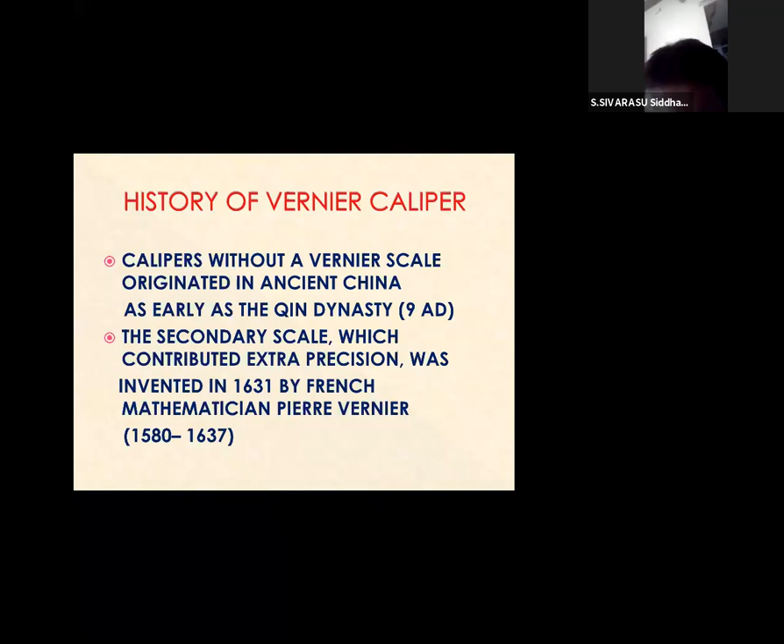Before entering into all these things, what about the history of vernier caliper? They invented the instrument in China, during the dynasty period, 9 AD. In China only, initially, they founded it. Later, the vernier caliper came in two scale systems: one is the main scale, another is the sliding scale, the vernier scale. The secondary scale, which contributes extra precision, was invented in 1631 by a French mathematician and scientist. His name is Pierre Vernier. By using his name, it was called vernier caliper.

Now, why is it called vernier caliper? The vernier caliper has two scales. One is marked along the whole length of the caliper, with graduations marked according to the length of the caliper. Another part slides over this scale, and this scale system was invented by Pierre Vernier, the French mathematician. By using his name, the caliper is called Pierre Vernier caliper.

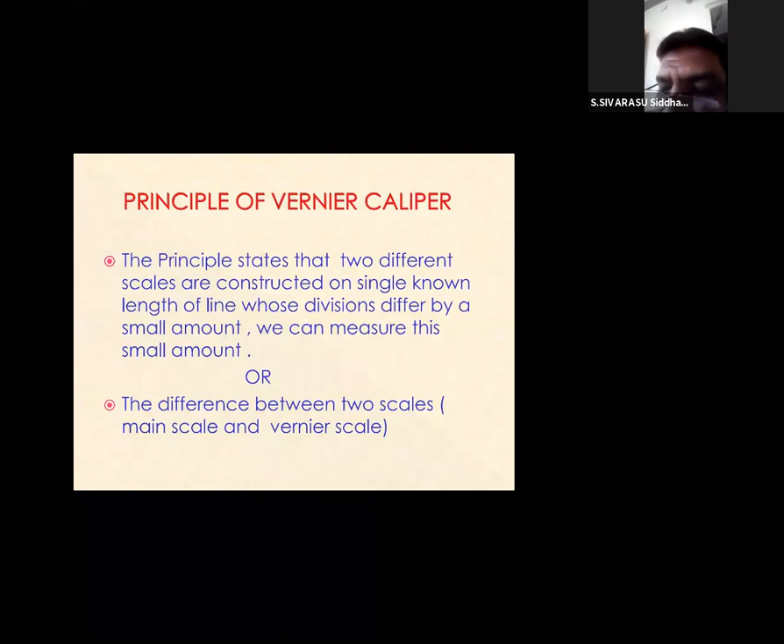What is the principle of the vernier caliper? The principle states that there are two different scales constructed on a single known length of line, whose divisions differ by a small amount. There is a difference between one main scale division and one vernier scale division, which we will discuss later. Based on this difference in divisions, we can measure that small amount using the vernier caliper. In short, you can say the difference between the two scales, one main scale, another the vernier scale, is the vernier principle.

Sir, can I unmute it so that I can ask the trainees a question for clarification? Hello? Do you have any doubt on what was discussed?

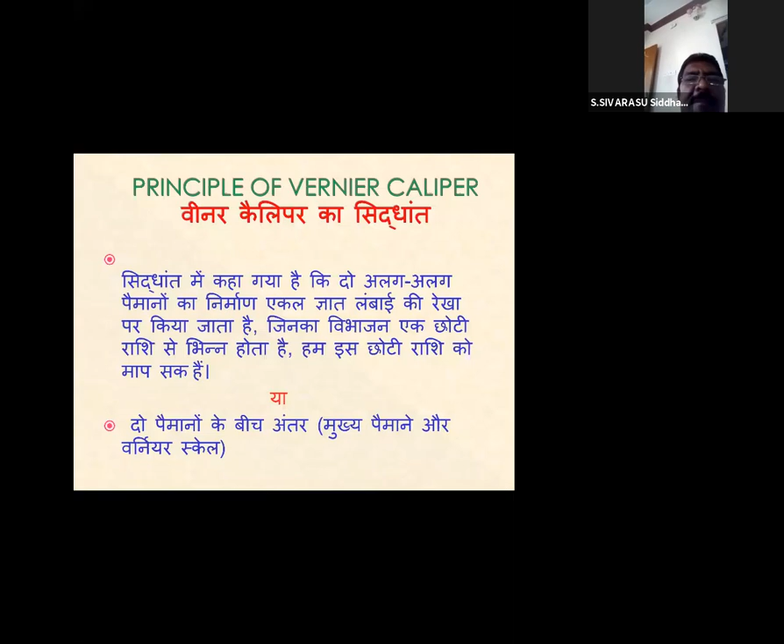What is the next one? What is the use of vernier caliper? I will show in the form. By using the vernier caliper, we can measure three types of dimensions. One is measuring the external dimension of a job, that is outside diameter. Another is we can measure the internal dimension, that is internal diameter of any kind of job. Thereafter, we can also measure the depth of the job. So this is the main use of vernier caliper. By using it, we can measure the job with an accuracy of 0.02 mm. There are different measurements we can take: internal measurement, external measurement, and depth measurement.

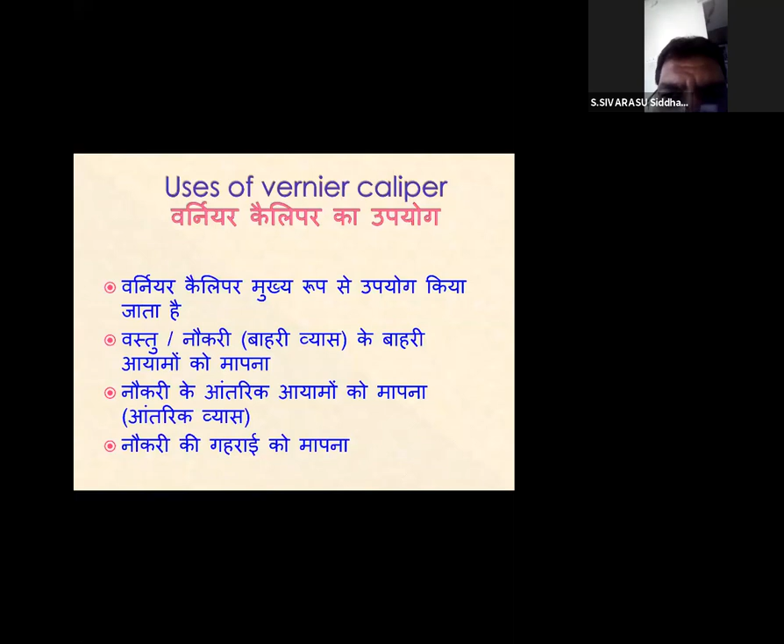Now we'll discuss the vernier caliper. What are the major parts of the vernier caliper? Now you see this. The upper part is having a nib that we call the inside measuring jaws. By using that, you can take the internal measurements.

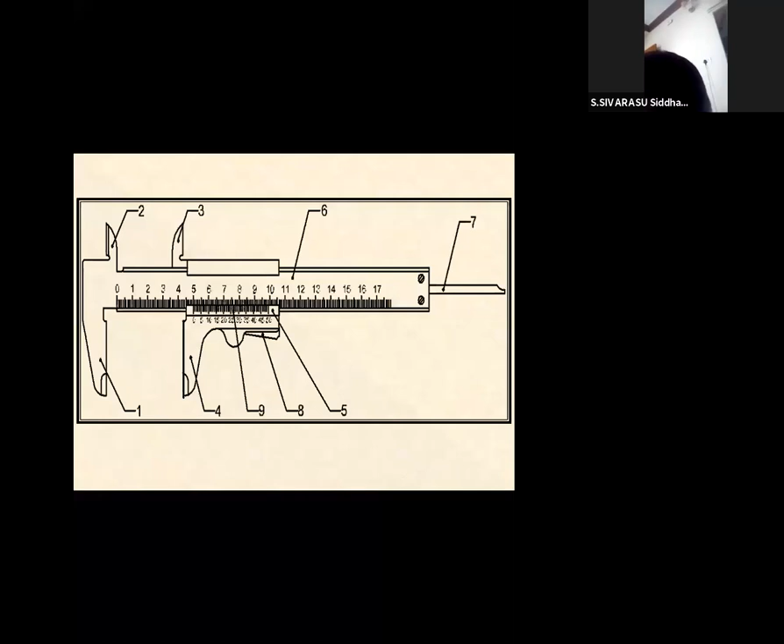What is the use of each and every part will be discussed. Once again I will tell you the parts names: part number 1 and 2 is the fixed jaw, part number 3 and 4 is the movable jaw, part number 5 is the vernier slide, part number 6 is the beam, part number 7 is the depth bar, part number 8 is the thumb lever, part number 9 is the vernier scale. These are the parts of the vernier caliper.

Now do you have any doubt?

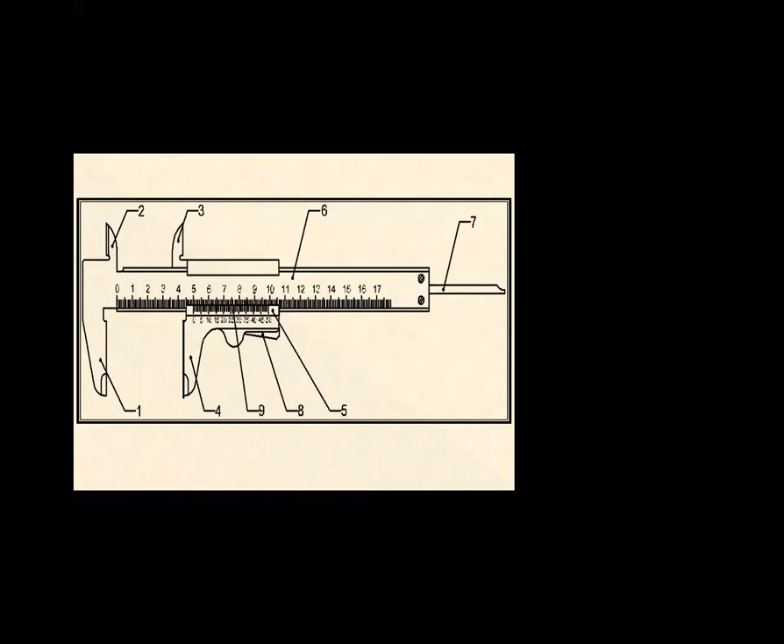Now I told you already about the parts - it is a fixed jaw, I will show you and explain that part. The fixed jaw is part of the beam scale, which is attached to the beam scale. So one jaw is for taking external measurements, and another jaw is for taking internal measurements.

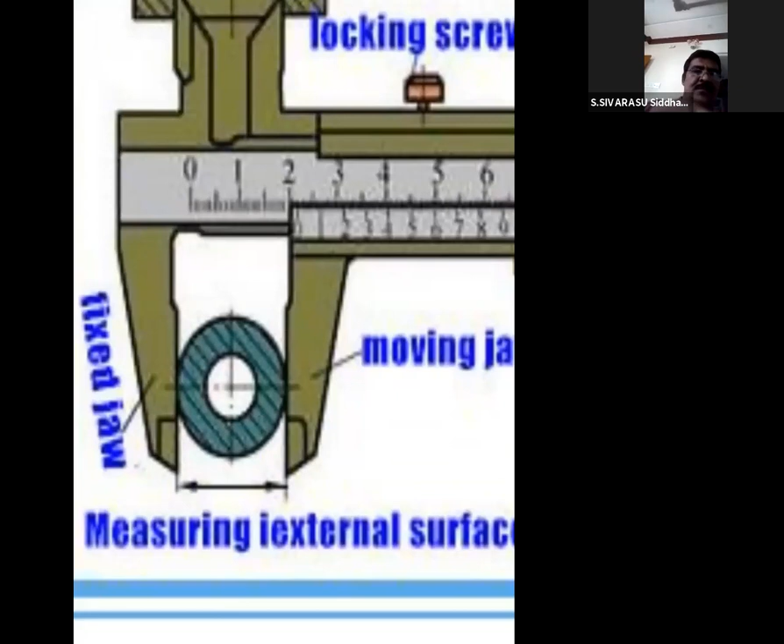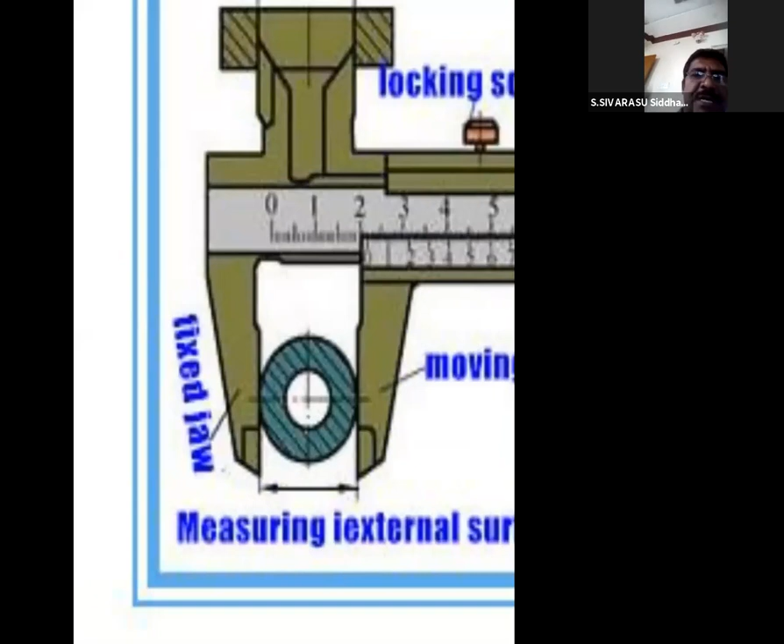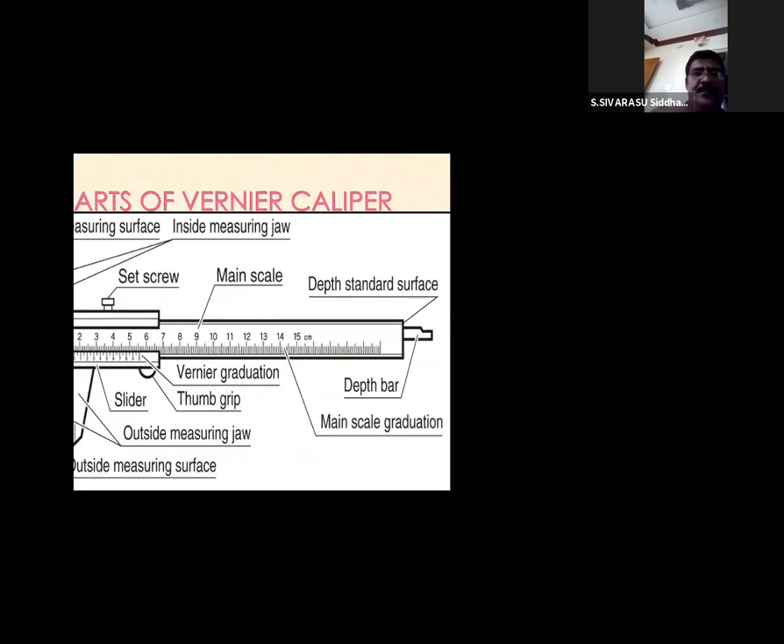Next is part 3 and 4, that is the movable jaw. Why do we call this the movable jaw? This movable jaw is sliding over the fixed jaw. The fixed jaw's main scale or beam is attached to the fixed jaw, and the movable jaw slides over the fixed jaw, that is the beam. Once again, I will tell you - you can see the figures.

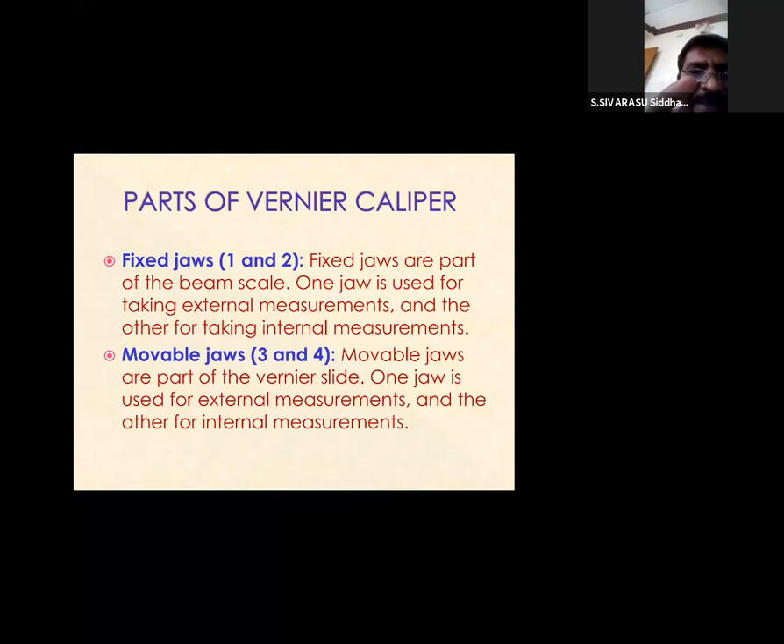Part numbers 3 and 4 are the movable jaw, which is also part of the vernier slide. Part number 3 is mainly used for taking internal measurements, supporting internal diameter measurements. Another jaw at the bottom, part number 4, is used to take external measurements.

Now using part number 1 and 4, by supporting this, we can take external measurements, outside diameter. Part number 2 and 3, by using that, we can take internal dimensions, internal diameter.

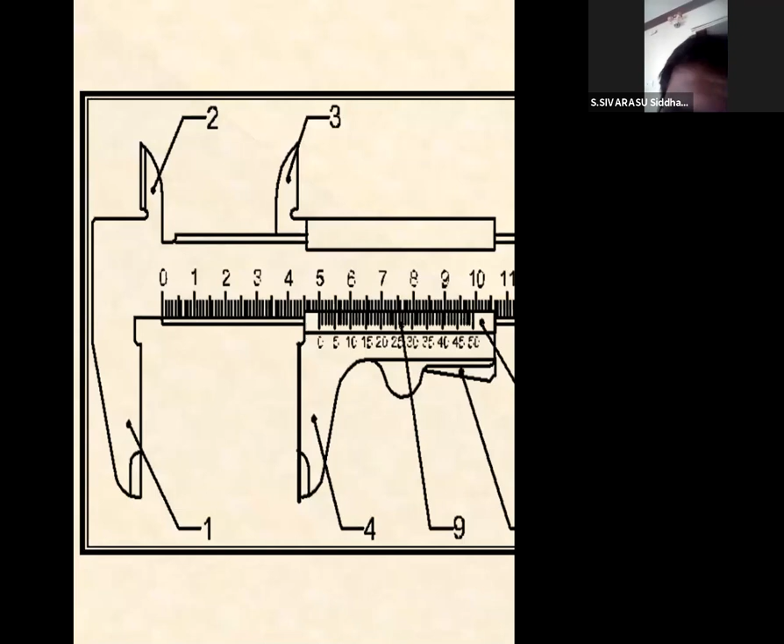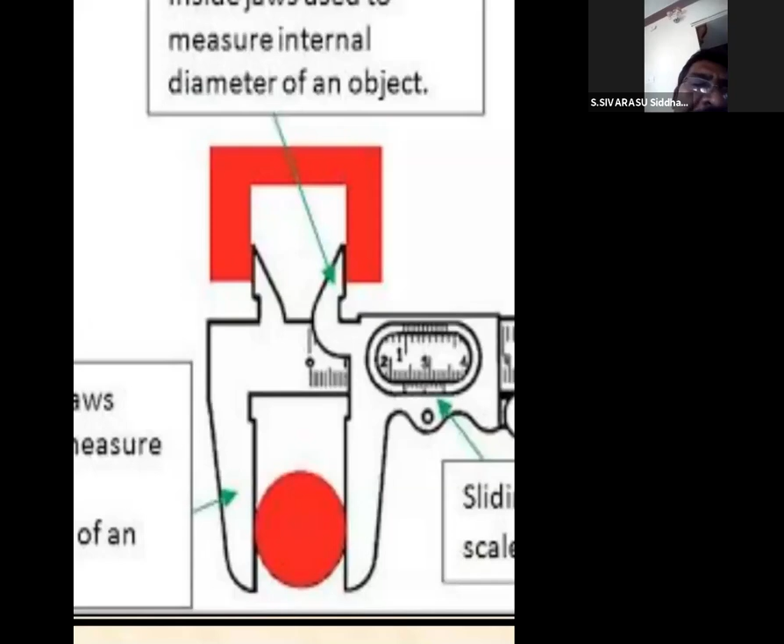Now I will show the measurements and how they are taken. You see part number 1 and 4 taking external measurements. 2 and 3 support taking internal measurements.

Now you see part number 5. I will show it in the PPT in the Hindi version.

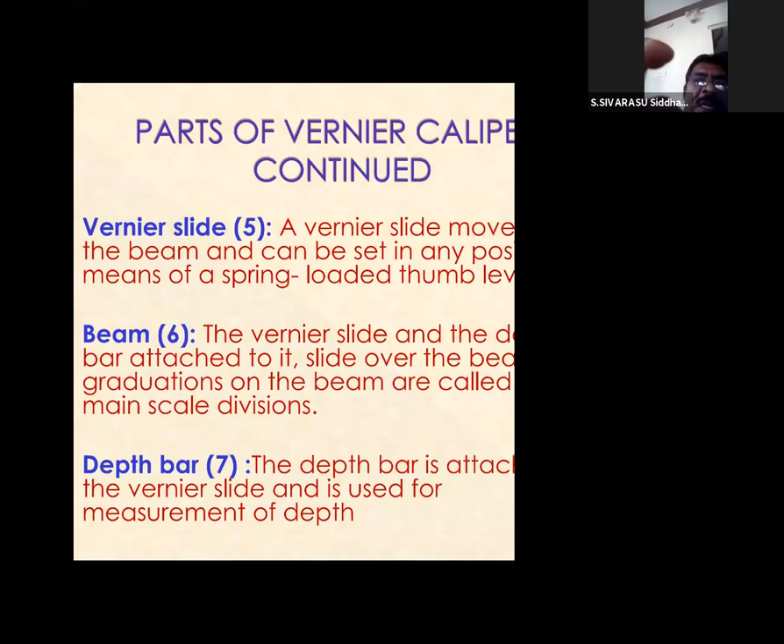The vernier slide moves over the beam. It can be set in any position, locked by means of a spring loaded thumb lever. Here, part number 5 is the vernier slide, which slides over the beam and can be set in any position using a spring loaded thumb lever. I'll show you part number 5.

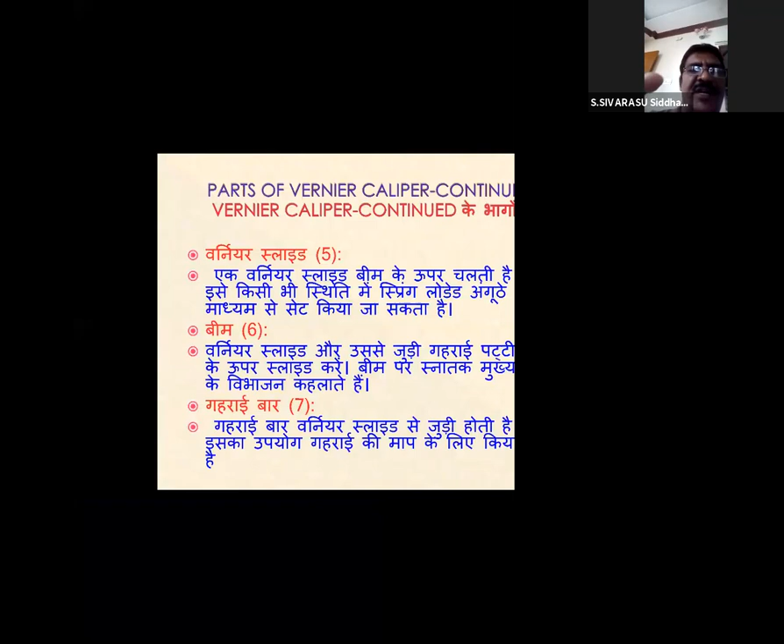So this is the vernier slide. Part number 8 is the thumb lever. When you press part number 8, the thumb lever, it moves the jaw slide over the beam. When we leave it, automatically at that position it will lock due to spring compression. It will remain in the same position.

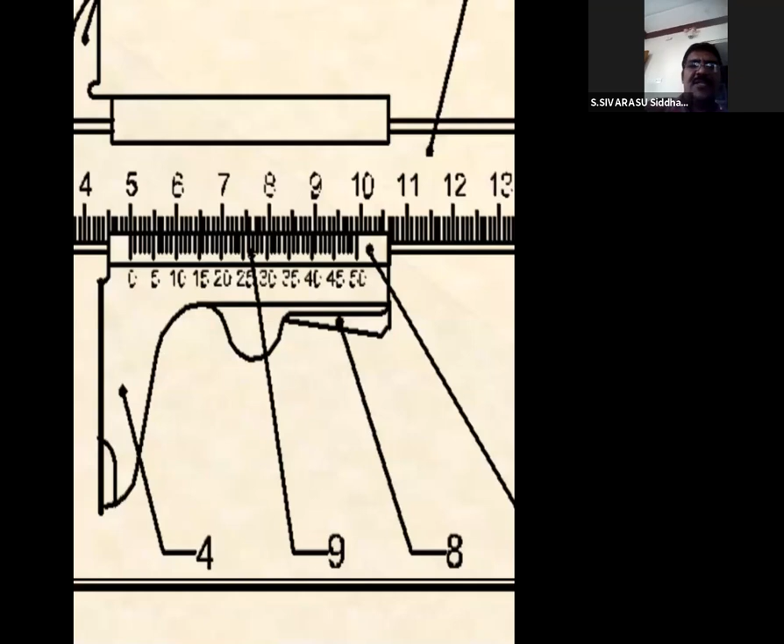Part number 5 is the vernier slide, which slides over the beam, and it can be set in any position using part number 8, the spring loaded thumb lever.

Next is the beam, part number 6. I will show in the Hindi version also. The vernier slide and the depth bar are attached to this beam, and the vernier slide slides over the beam. The graduations on the beam are called the main scale division. Here you can see the vernier caliper graduations marked on this.

Now you can see part number 6, where the graduations are marked. We call this the main scale division. On this main scale, graduations are marked according to the length of the vernier caliper, marked throughout the length of the beam. That graduation we call the main scale division.

Next, part number 7 - this part is called the depth bar. The depth bar is already attached to the vernier slide and is mainly used for taking depth measurements. Now I will show you measuring the depth using this part.

So: vernier slide, beam, depth bar. If there is any doubt, you can raise it.

The part number 8 is the thumb lever. This thumb lever is spring loaded, which helps to set the vernier slide in any position on the beam scale. Just spring action - when you press on the vernier slide, it freely slides over the beam. When the pressing is released, it will set in that position.

Once again repeating, the thumb lever is mainly used so that when you press this thumb lever, the vernier slide slides over the beam, that is the main scale beam. When your pressing is released, then it will be locked, set into a particular position. That is the main use of the thumb lever.

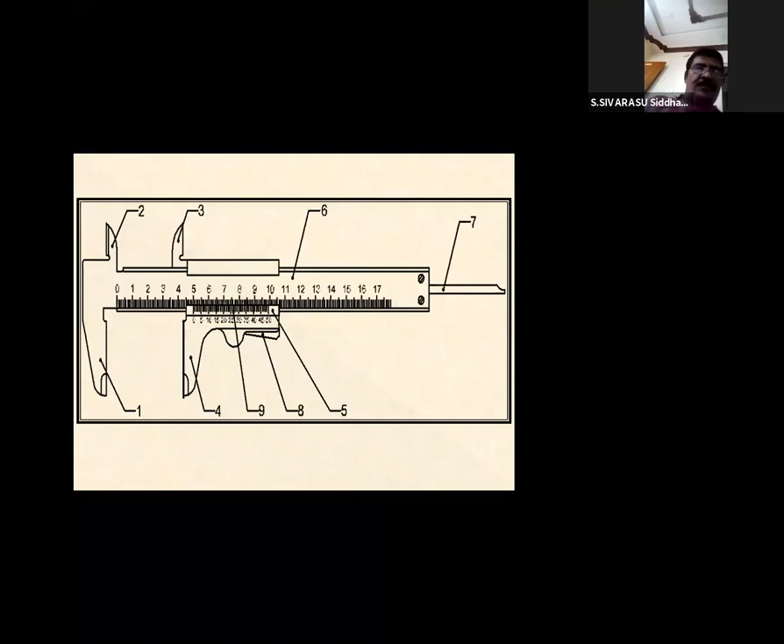So that's the thumb lever. Next part is the vernier scale. The vernier scale, like the main scale, has graduations marked on it. Graduation means dimensions are engraved on the main scale and vernier scale. The division of the scale we call the vernier scale division. I'll show you in the drawing.

Now you can see this part number 9. Here the vernier scale graduations are marked on it.

Once again, another diagram I will show you. This is the vernier scale. Now you can see the 1, 2, 3, 4 at the bottom - this is the vernier scale, and this is the main scale division. On the beam, which is having graduation, that we call the main scale division. I'll write 'beam' - this part is the beam. The beam has the main scale divisions. Here the vernier slide, which has graduations marked on it, that is called the vernier scale divisions.

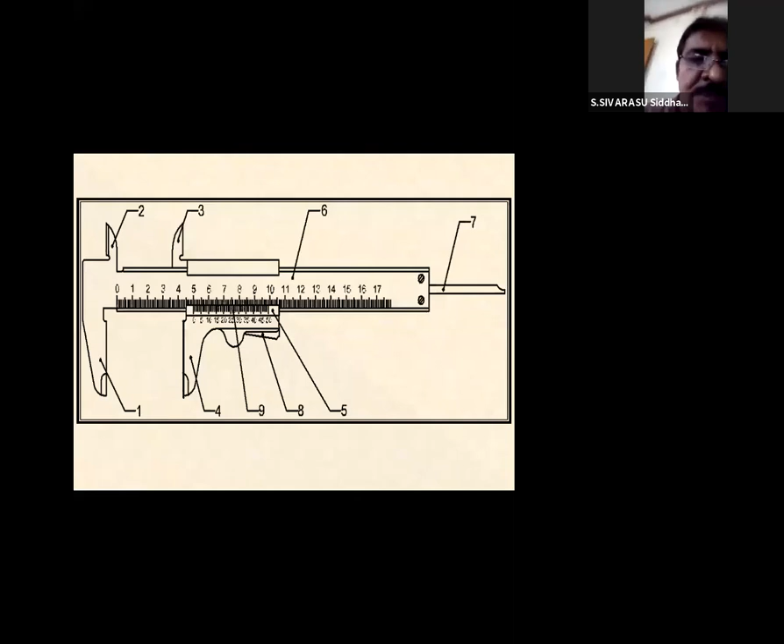Another part is the main scale. The main scale has graduations marked in metric divisions.

Sir, just a minute. Hello, do you have any doubt?

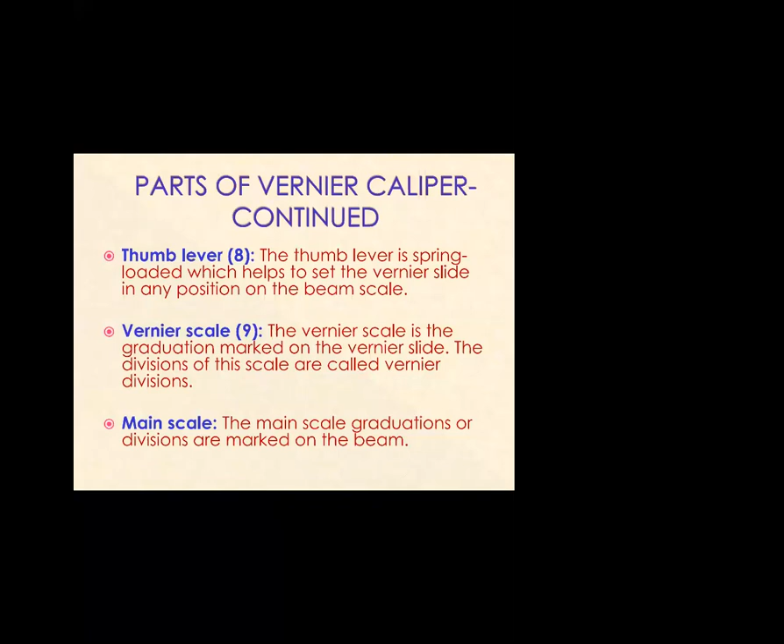Next is sizes of vernier calipers. What sizes are available? Vernier calipers are available in different sizes - you can say 150 mm, 200 mm, 250 mm, 300 mm, and 600 mm, etc.

This is the length of the vernier caliper. So different lengths are available for vernier calipers - 150 mm, 200 mm, 250 mm, 300 mm, and so on, increasing by 50 mm each time. Different lengths of vernier calipers are available.

Mainly, the selection of vernier caliper depends upon the measurement - what size of job you have to take. Suppose the job is 100 mm, a 6 inch vernier caliper is enough. If the job length is 250 mm, now you have to take a 300 mm length of vernier caliper. So according to the size of the job, we select the length of the vernier caliper.

It is a precision measuring instrument. When we are handling this vernier caliper, you have to take utmost care on that.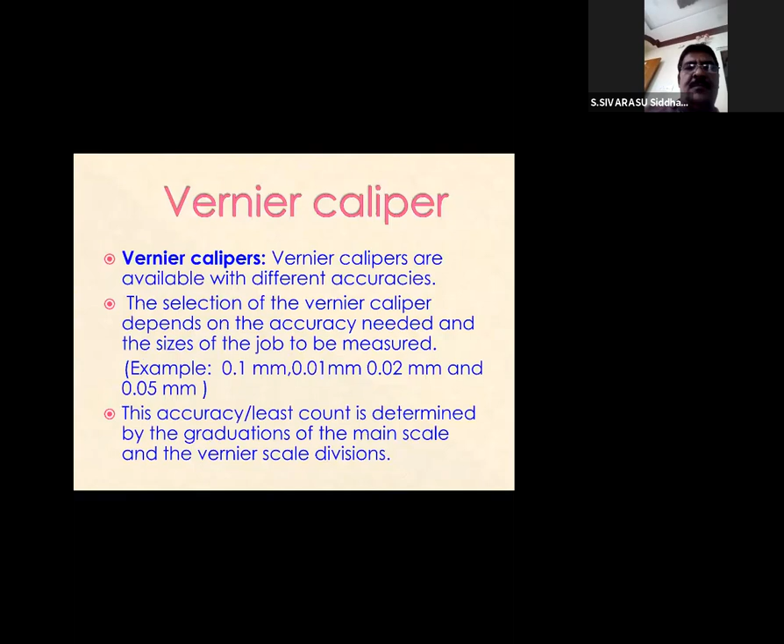Another point - vernier calipers are available in different accuracies. The selection of vernier caliper depends upon the accuracy you require. What are the different accuracies? Even 0.01 mm accuracy, 0.02 mm, 0.1 mm, and also 0.05 mm - there are different accuracies of vernier caliper available.

What size? The selection of accuracy of the vernier caliper depends on what size of accuracy of job you are going to measure. According to that, you have to select the different accuracy of vernier caliper. The accuracy or least count you can determine by using the graduation of the main scale and the vernier scale. How do you get the accuracy? The graduation which is marked on the main scale and the vernier scale - based on that, you can get the accuracy, or we can say the least count.

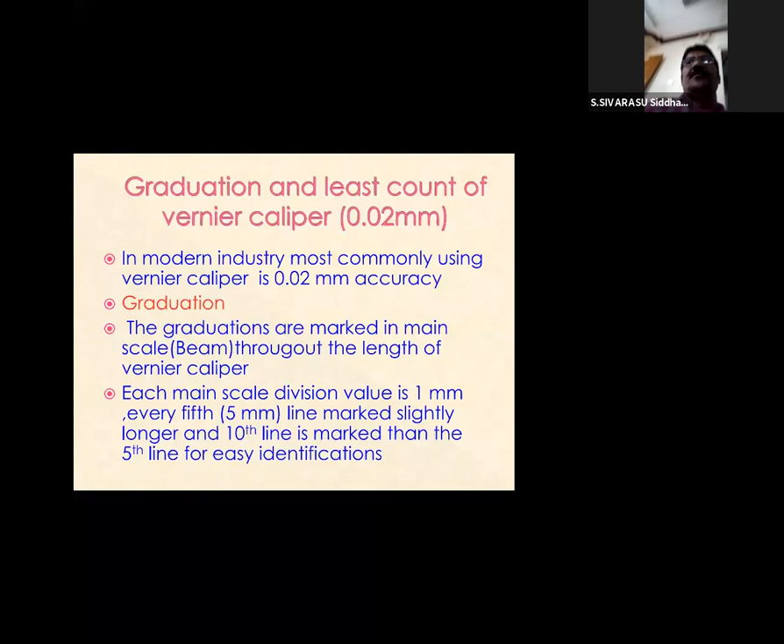Graduation and least count of vernier caliper. Now today we are going to discuss about the 0.02 mm accuracy of vernier caliper.

Already we have discussed that vernier calipers are available in different accuracies, example especially 0.1 mm, 0.01 mm, 0.02 mm, and 0.05 mm. There are different accuracies of vernier caliper available.

The graduations are marked in the main scale, that is called the beam. It is the main scale, marked throughout the length of the vernier caliper.

Each main scale division value is 1 mm. Now you can see this in the diagram. Every 5th division is a little bit longer than the normal graduation line, and slightly longer than the 10th line also, which is marked longer than the 5th line. Now I will show this diagram.

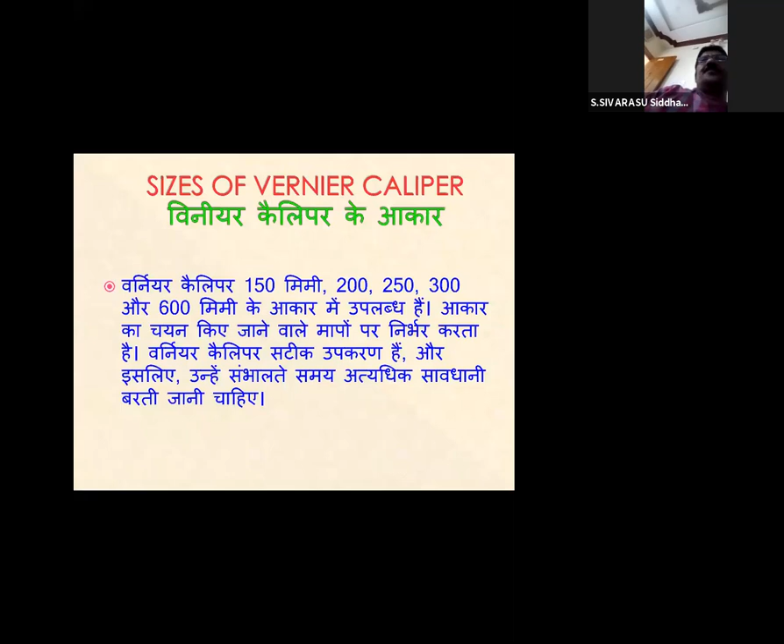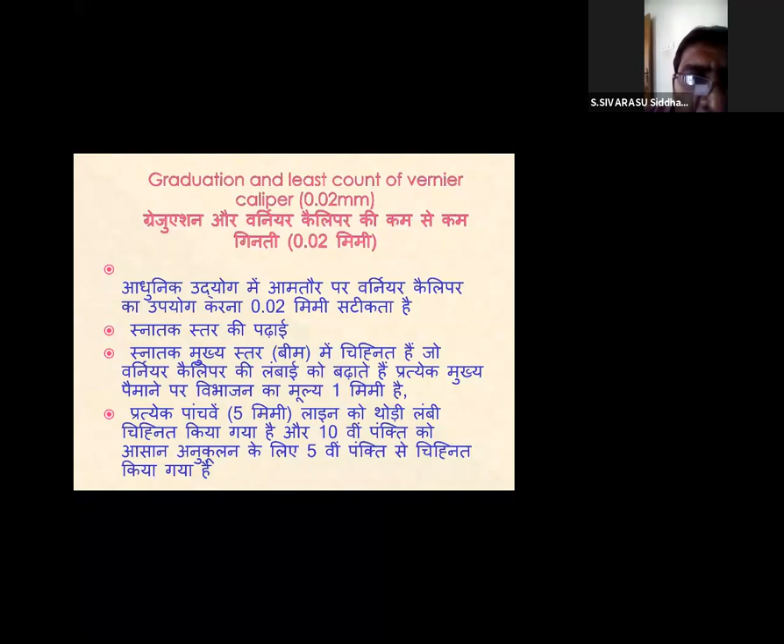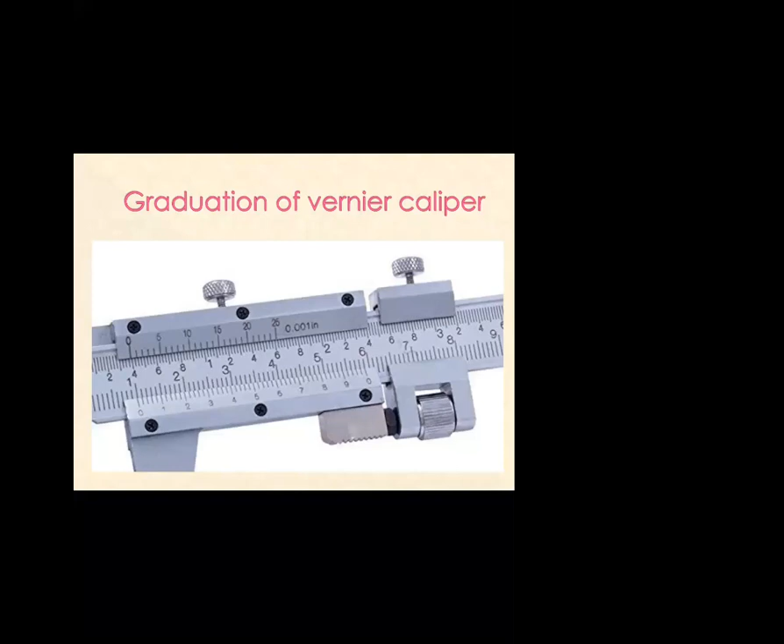Hello. So, any doubt? Hello sir, Ram Kumar here. Are you done with it, sir? Another 5 minutes. Oh yeah, no problem sir, take your time. Sure, okay sir.

So now I am going to discuss about how the least count of the vernier caliper is calculated. Like that, I already told you the graduations are marked on the main scale divisions.

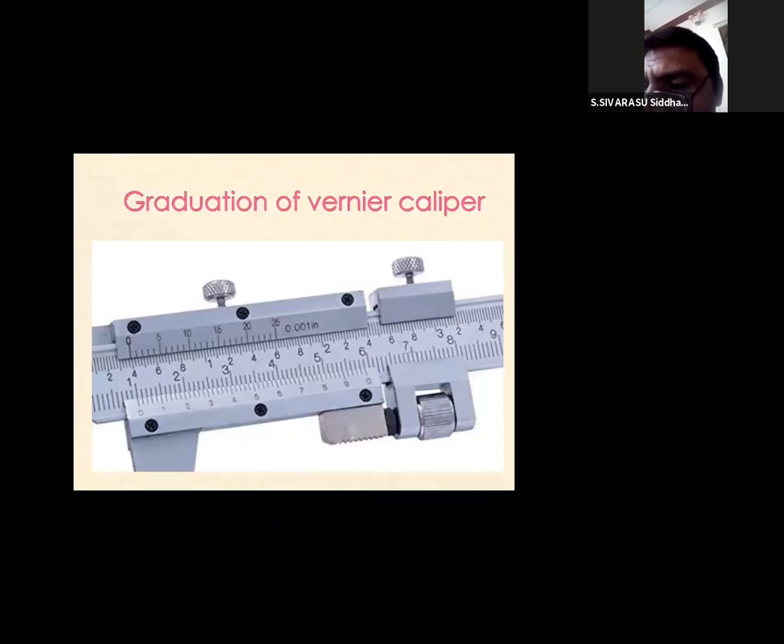Yes, some people are... this... sorry.

You can see the least count of vernier caliper, that I will explain you. The graduation is the common graduation of the common type of vernier caliper with the least count of 0.02. That thing we are going to discuss about.

Now in this vernier caliper, each main scale division value is 1 mm. In that, we have taken 49 main scale divisions, which is equally divided into 50 vernier scale divisions. That is nothing but 49 mm.

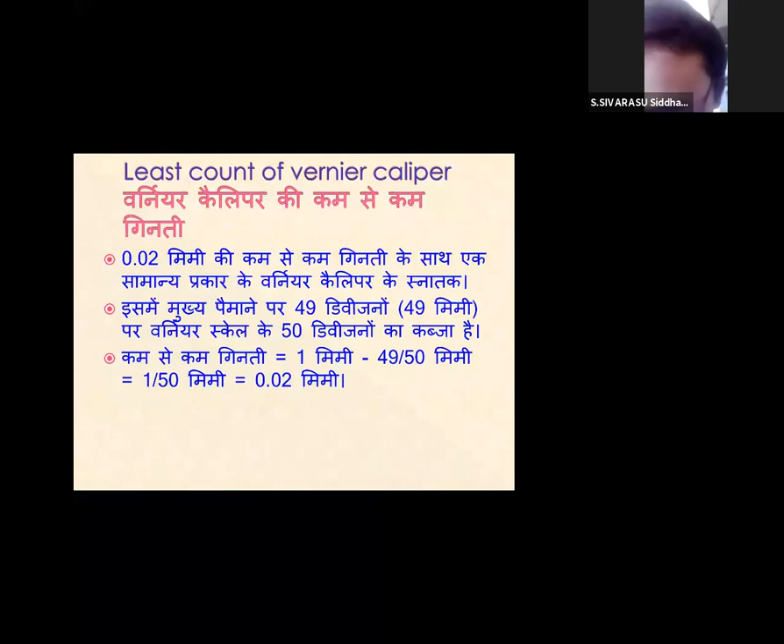The least count - what is meant by least count? The difference between one main scale division and one vernier scale division is called least count.

One length of one main scale division is equal to 1 mm. They have taken 49 main scale divisions, that is equal to 49 mm. The 49 mm is equally divided into 50 divisions of vernier scale division.

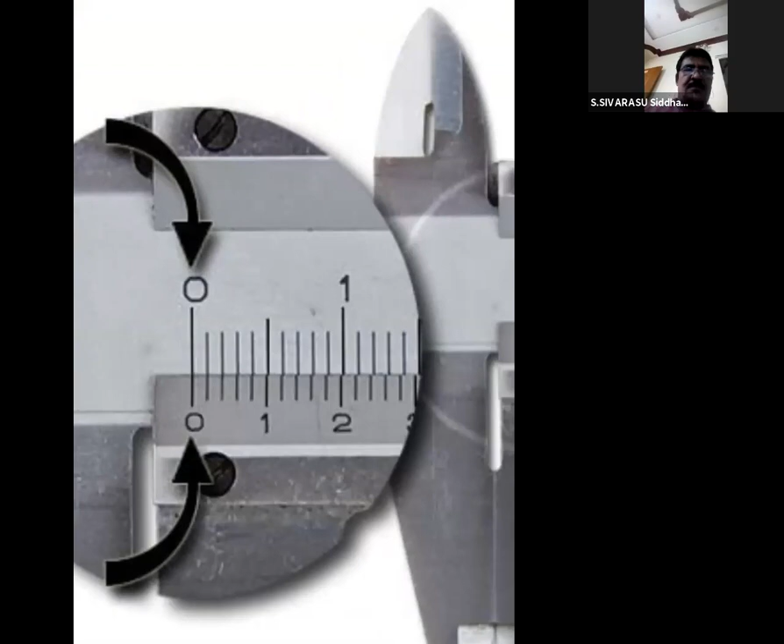When both the jaws are joined together, it will show 0, 0 reading. So main scale division line and vernier scale division joint shows 0, 0 read. Both the fixed jaw and mobile jaw joined together gives 0, 0 reading - that is the correct setting.

Generally, when you are using this, how to use the vernier caliper in the right way? First, clean both parts of the caliper completely, free from burrs and other obstacles. You have to clean the vernier caliper using a soft cloth.

Clean it so it is free from burrs. There should not be any burrs or obstacles.

Then loosen the clamping screw on both sliding jaws. Set the sliding jaw slightly larger than the measurable feature - suppose if you are taking approximately 50 mm diameter, you want to open it up to maximum 60.

Then the fixed jaw must be touching the particular surface where you are taking the measurement. Then bring the moving jaw together and feel it touch - according to the measurable feature, the jaw should touch on that.

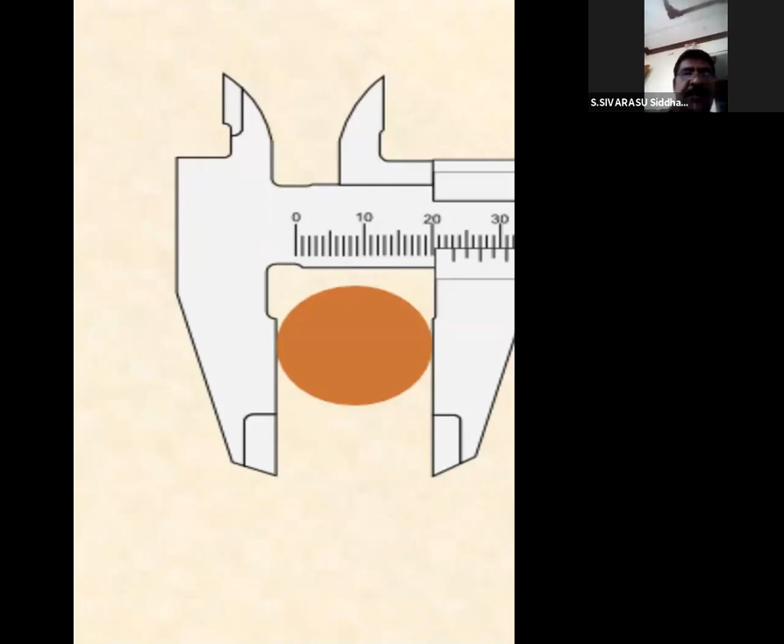For example, I'll show this drawing once again. When you are taking measurements, you have to see that in this position, the jaw must touch on the fixed jaw and mobile jaw. You have to take that.

Before using the vernier caliper, you must clean the measuring surfaces and sliding surface wherever needed - it should be free from burrs.

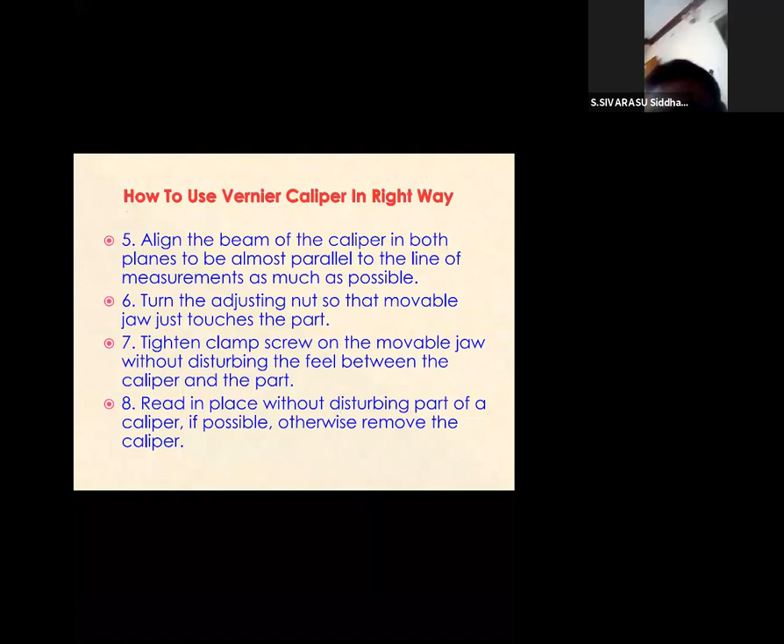Place the fixed jaw in contact with the reference point of the feature. Thereafter, align the beam of the caliper in both planes to be almost parallel to the line of measurement where you have to take it.

The fixed jaw is already touching slightly - you have to contact the job, see contact on the fixed jaw. Align the movable jaw, bringing the caliper to touch and contact on the other end of the measuring surface.

So align the beam of the caliper in both planes to be almost parallel to the line of measurement as much as possible.

Thereafter, wherever required, you can turn the adjusting nut so that the movable jaw touches the part.

Thereafter, you have to tighten the locking clamp screw on the movable jaw without disturbing the feel between the caliper and the part.

Read in place without disturbing the position of the caliper if possible, otherwise remove the caliper. You can take the measurement this way, or otherwise remove the caliper to read it.

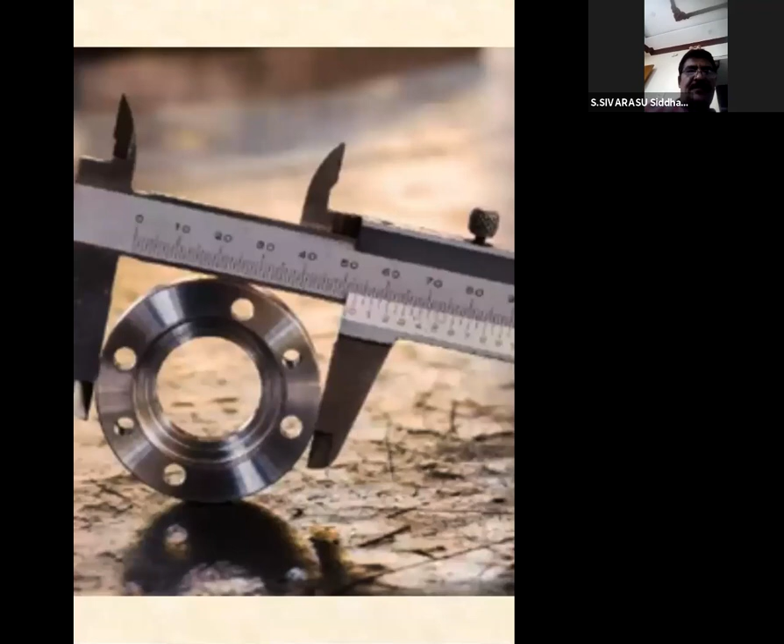When holding that, you have to see how they are taking the measurements. You got to see the measuring of the job. How they are taking measurements, graduation and measurement will be discussed in the next class. You see how they are holding the job in such a way, and how the graduations are concerned, you can see that.

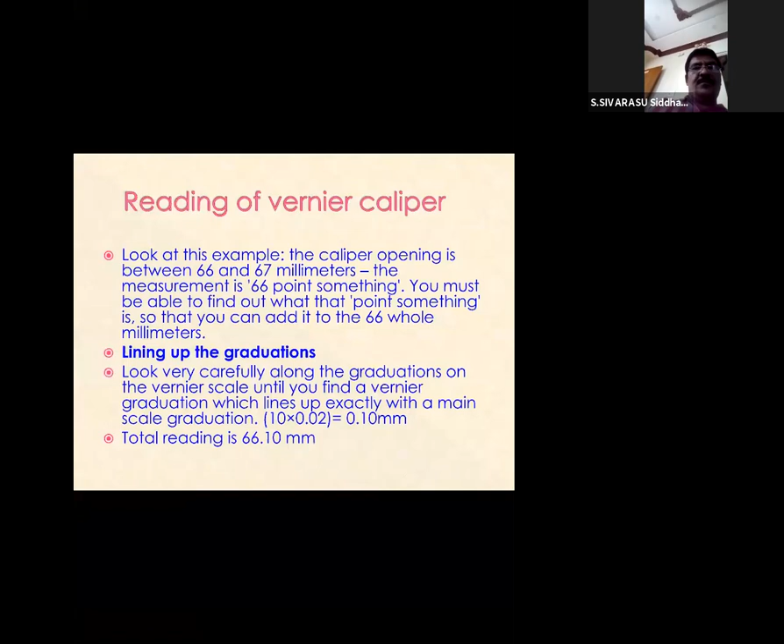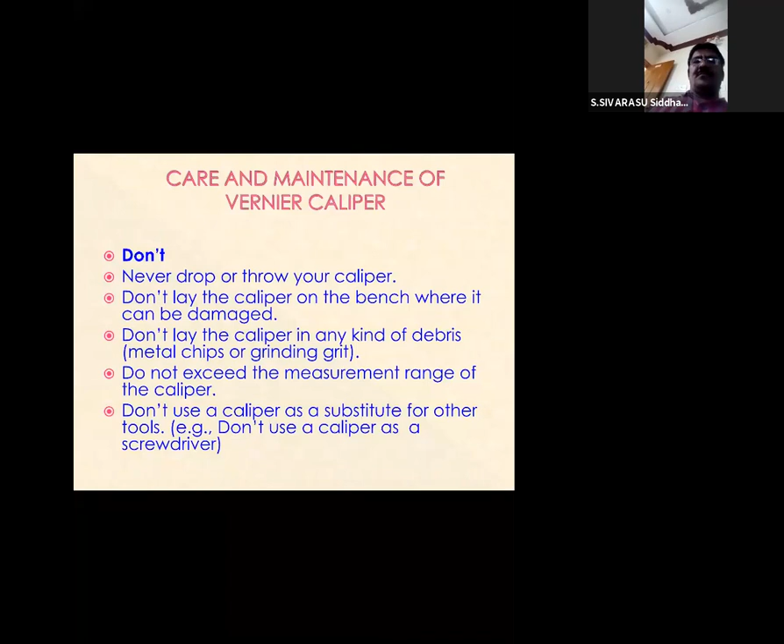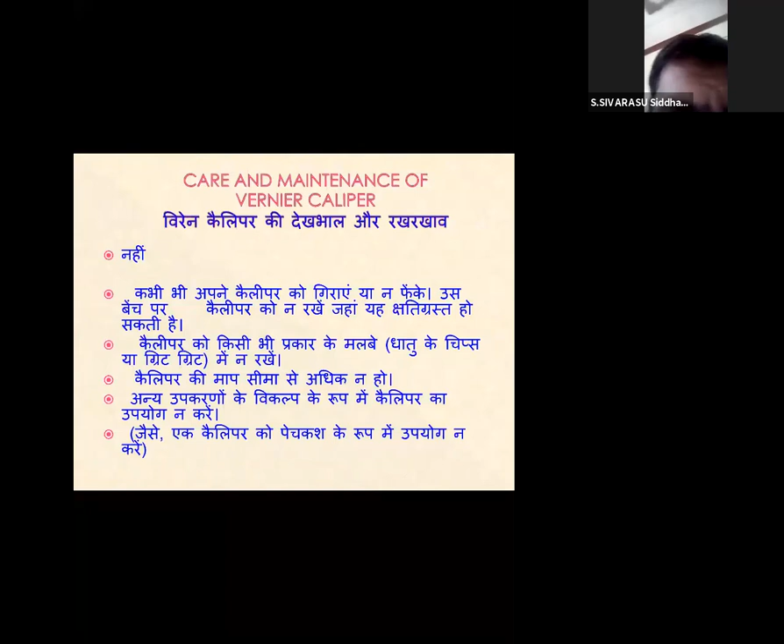Sir. Sir, hello, sir. Hello, sir. Sir. Hello.

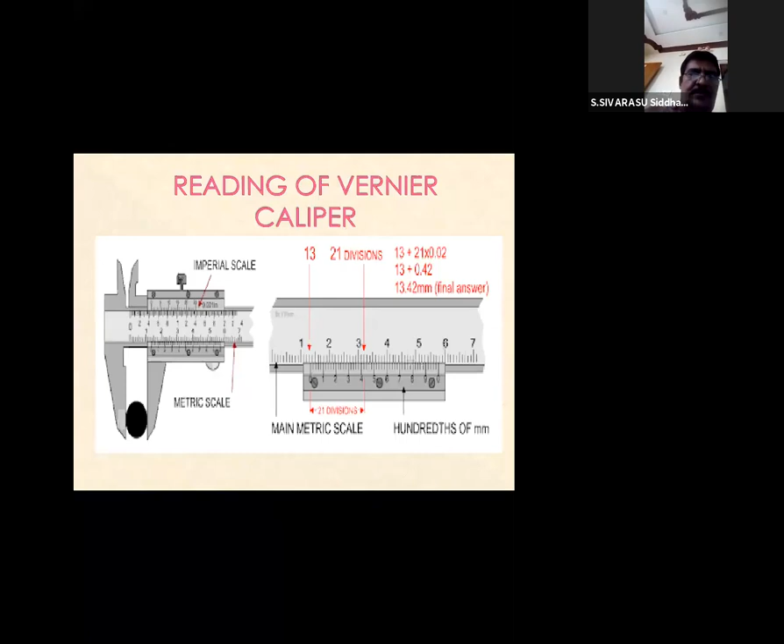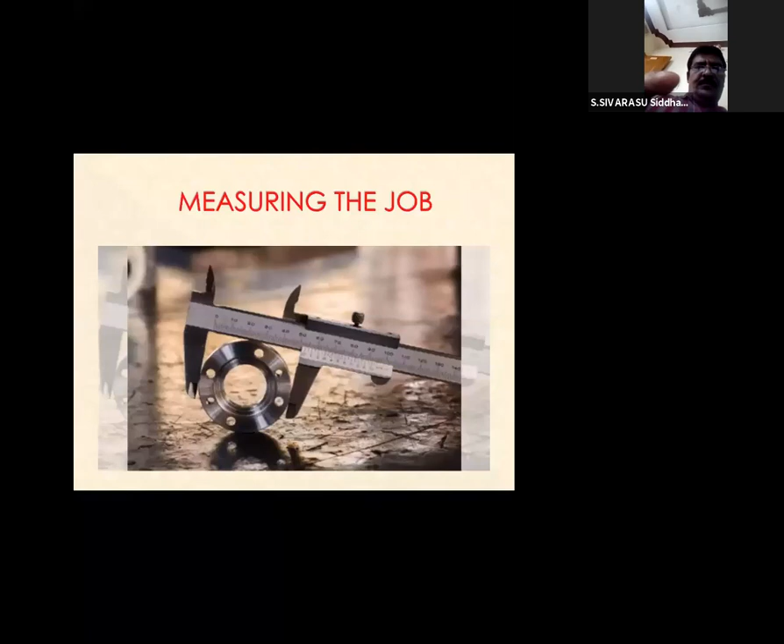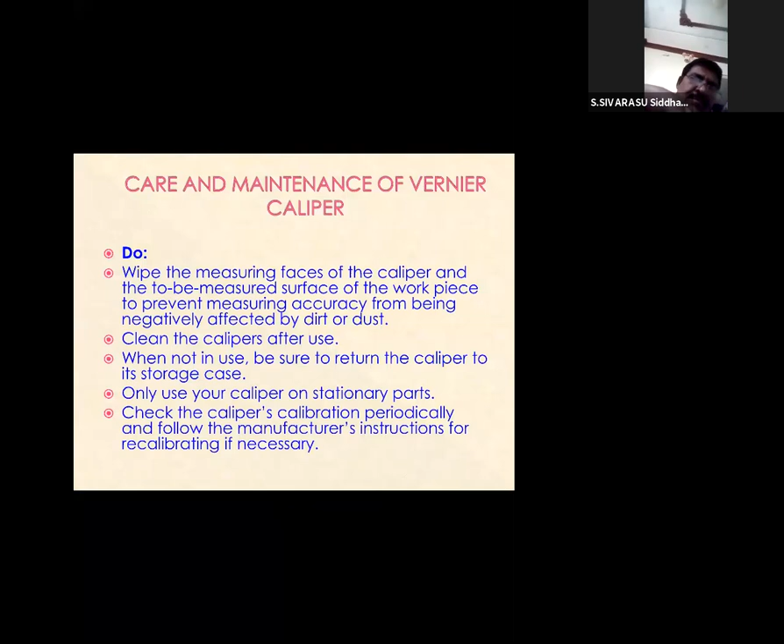Once again, I will summarize this. So far, what we have discussed: what is a vernier caliper, what is the use of vernier caliper, what are the principles of vernier caliper, what are the parts of vernier caliper, what is the use, how the graduations are marked on that. That we have discussed.

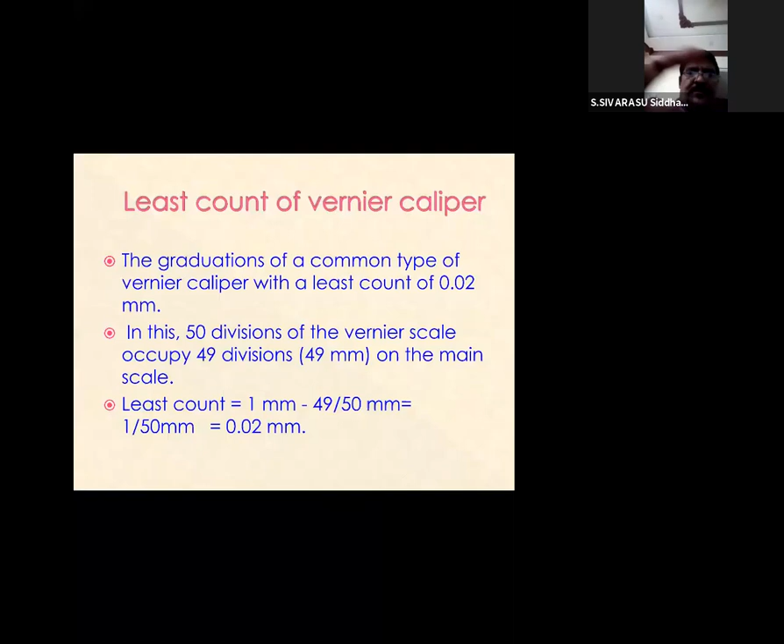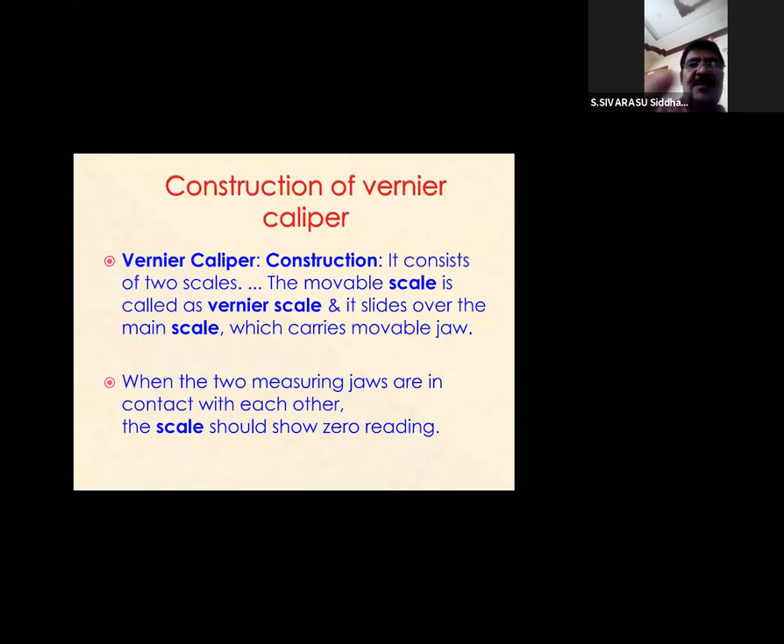First, discuss on what is the construction of the vernier caliper, what are the features available, and how the vernier caliper is constructed. Like that we have discussed it.

Now we introduce it. That means the caliper is a highly precision measuring instrument which is used to measure the job within an accuracy of 0.02 mm.

What is the use of vernier caliper? By using the vernier caliper, we can take the internal measurements, external measurements, and the depth of the job.

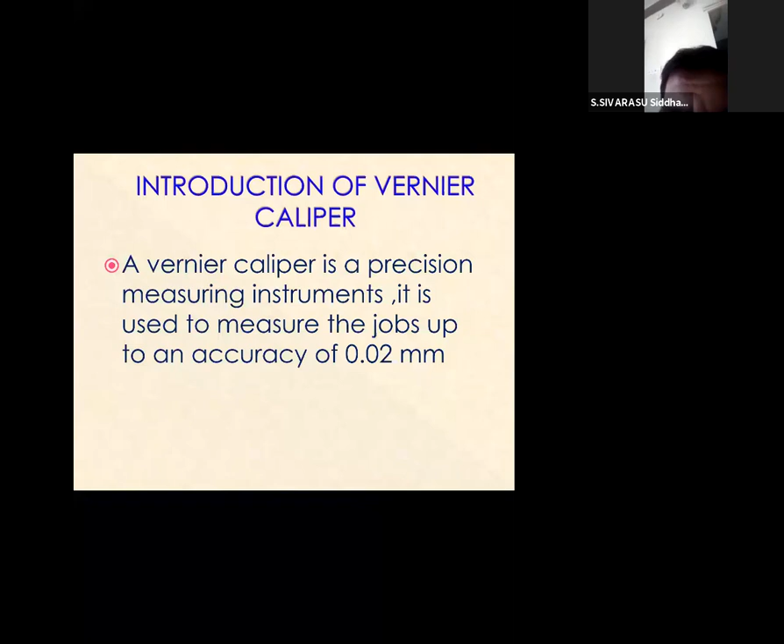The selection of the size depends upon the measurement to be taken.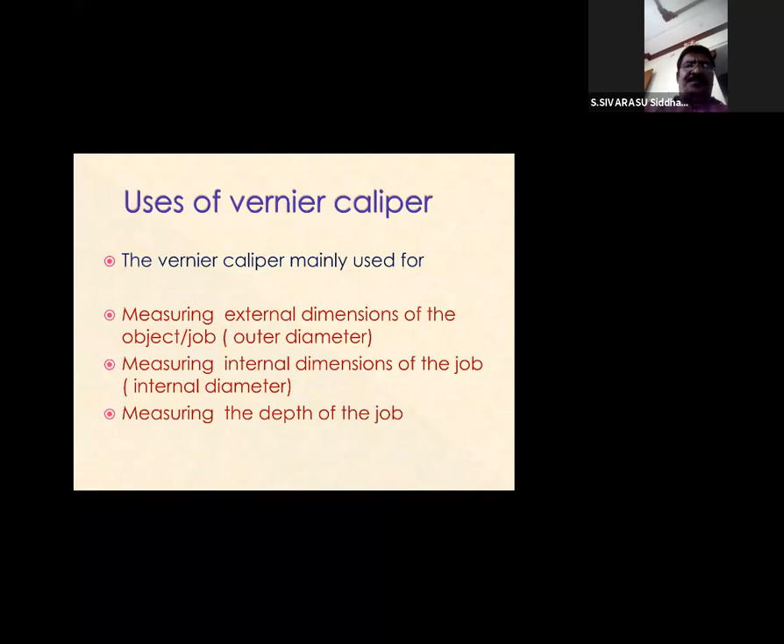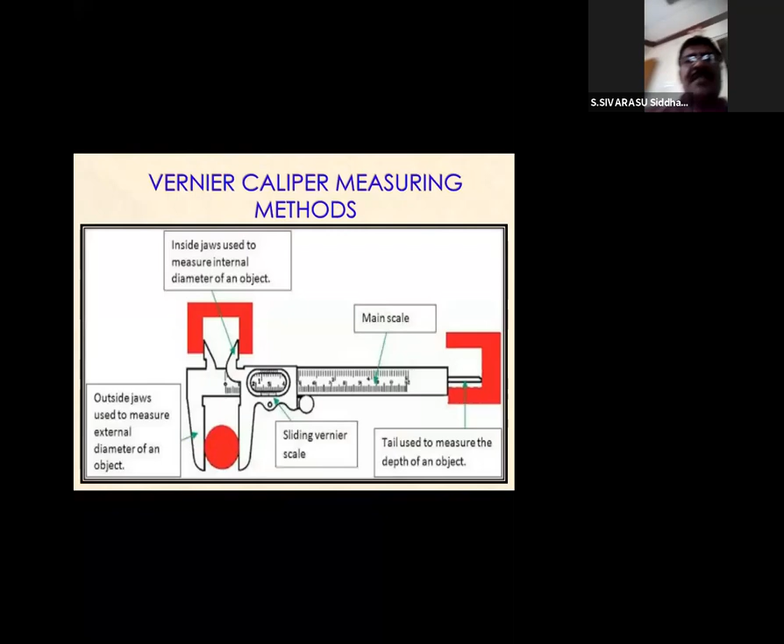So I will show the size of vernier caliper, how it is constructed, what it consists of.

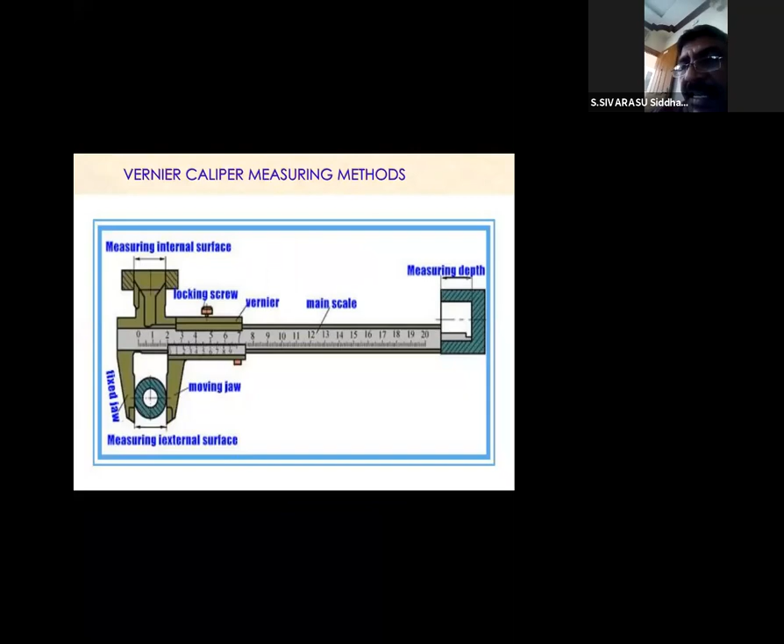Vernier caliper consists of two scales. The movable scale is called the vernier scale and it slides over the main scale, which carries the movable jaw. The two measuring jaws are in contact with each other. The scale shows the zero reading.

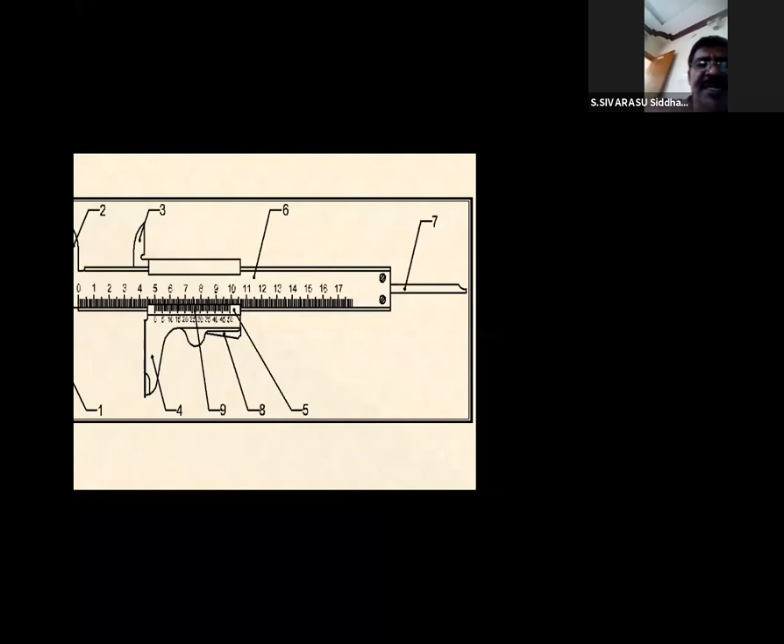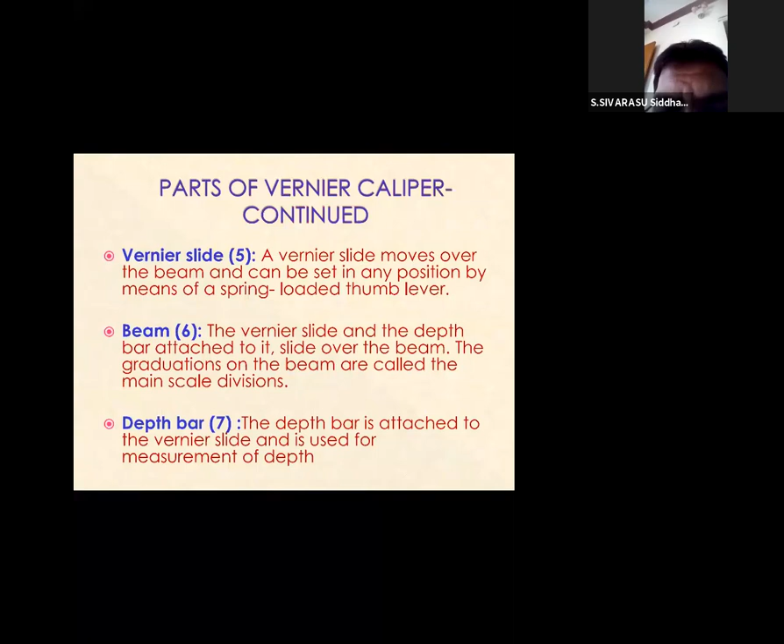So vernier calipers are available in different accuracies: 0.1 mm, 0.01 mm, 0.02 mm, and 0.05 mm. By using the difference between the two scales, we can find what we call the accuracy or least count of the vernier caliper.

The two scales are marked: one is the main scale, which is marked on the beam; the other one is the vernier slide, which is marked on the vernier scale division.